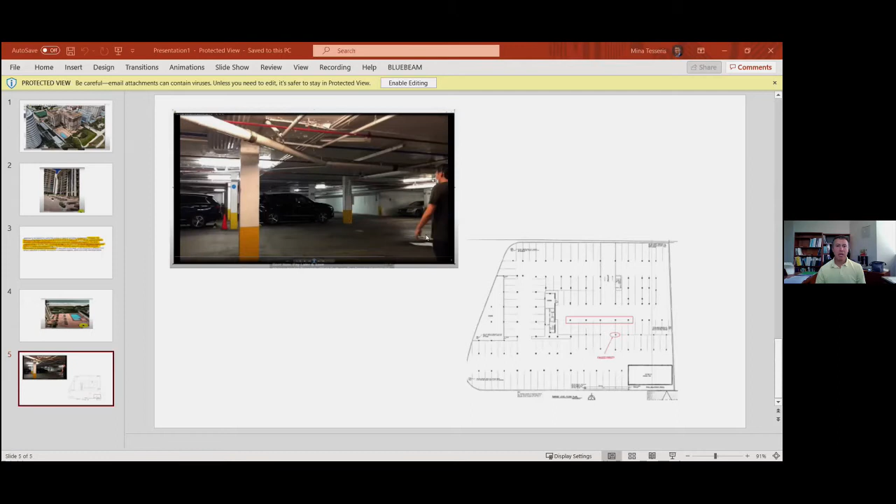So if we go back to the previous photos here, imagine this plaza deck disappearing, and that plaza deck is what's supporting the columns in this building. And when that plaza deck disappears, all of a sudden you have columns that are spanning from the second floor down to the basement with no lateral support from this parking garage slab.

And when that happens, what that does is it weakens the slab, and that is what initiated the collapse for the building. If you look at the video of the collapse, which is available all over the internet, you'll see that this is the area that collapsed first, and then everything else followed. So the lessons learned from this, what can we learn from the collapse?

Mina, can I just stop you for one sec? Can you just maybe give us the top lesson that we learned, and we can maybe come back to some of them at the end? Okay, sure. I'm going to give you two. Okay, two's good.

When you're making changes, always get a permit for the work that is being done, of course. And finally, as-built plans and design plans. This is important. I've harped on this for many years, but have your design plans available and your as-built plans available, because if the engineer that inspected this building didn't have access to the drawings, the engineer would never have known that those drop panels should have been there.

Thanks, Mina. So, it's a great summary of what happened in Florida. And even just you taking us through it, we can see visually there were some signs there which may not have been paid any attention to, but adding those things all up can end up in such a catastrophe.

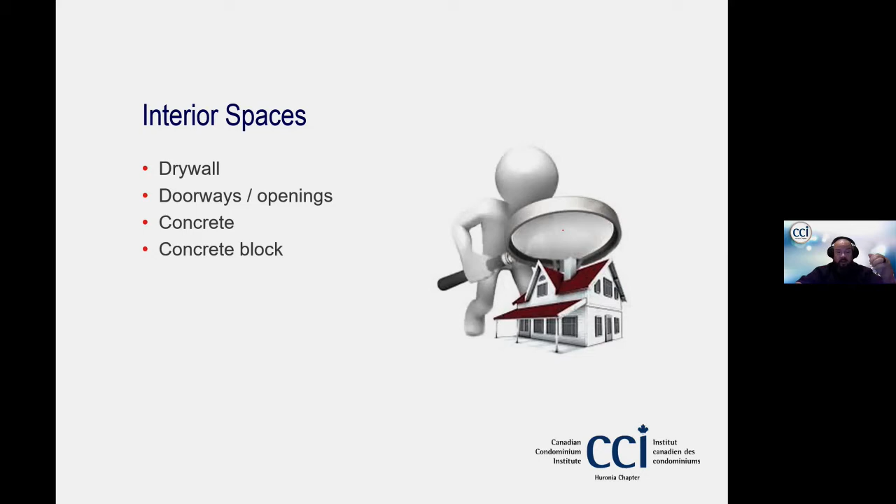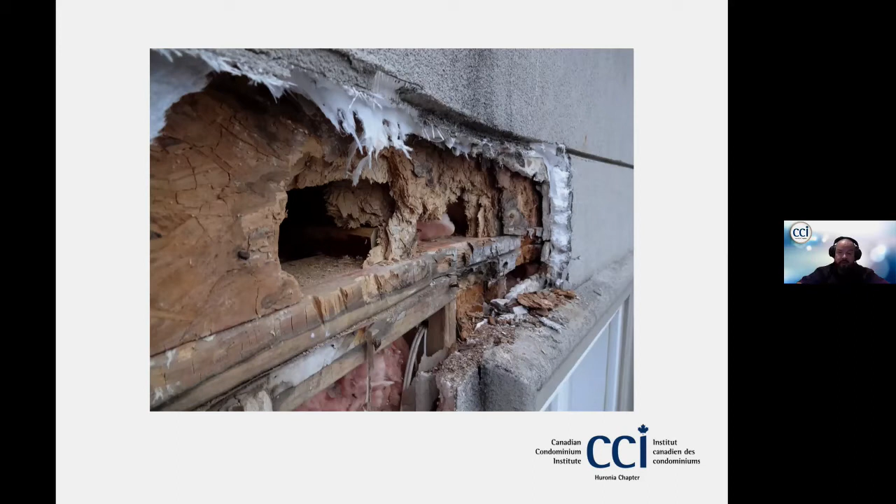And indeed, in this case, found out as soon as we opened up and removed that stucco, that the structure behind it, which was an all wood one, was being slowly eaten away by that moisture that was getting in. So despite the fact that it didn't start as a structural issue, it was becoming one because of water penetration. And so again, something you want to keep an eye on and jump on sooner rather than later.

Now, when this was investigated, it turns out that this moisture had gotten inside the assembly, and there were further wood components and steel components in behind that were getting quite severely damaged. So again, watch for these kind of things and jump on them sooner rather than later and have them looked at before they can have the potential to become an issue.

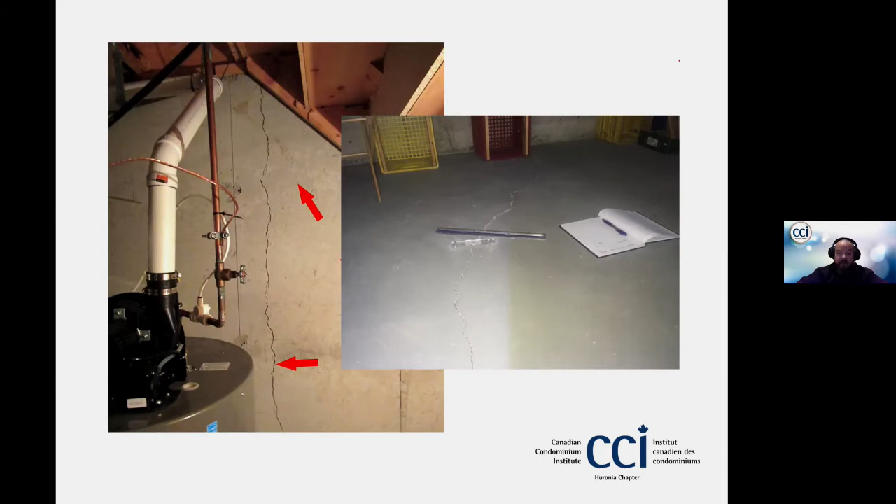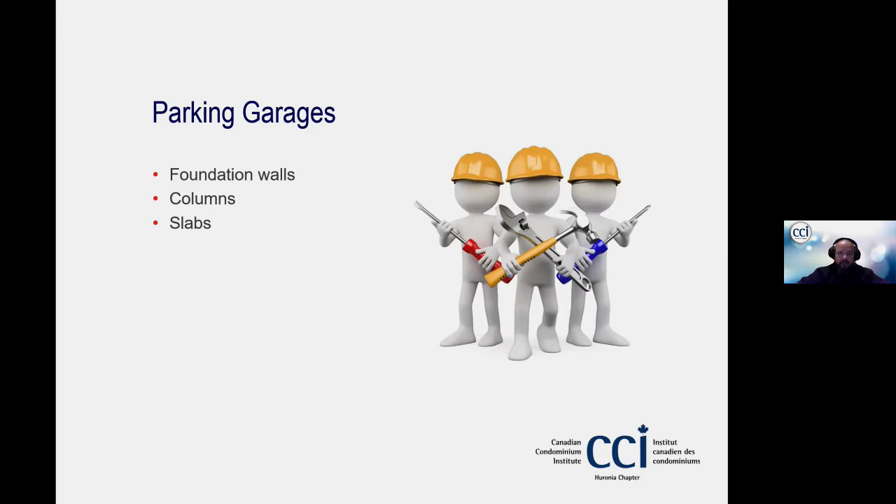Not a bad choice. Parking garage is an important one. And as you saw with the images from Florida, again, this is an important part of your foundations and is subject to quite harsh environmental conditions, including all that water and salt and everything else that could go in there. So when it comes to those, again, something to keep an eye on, something we see regularly.

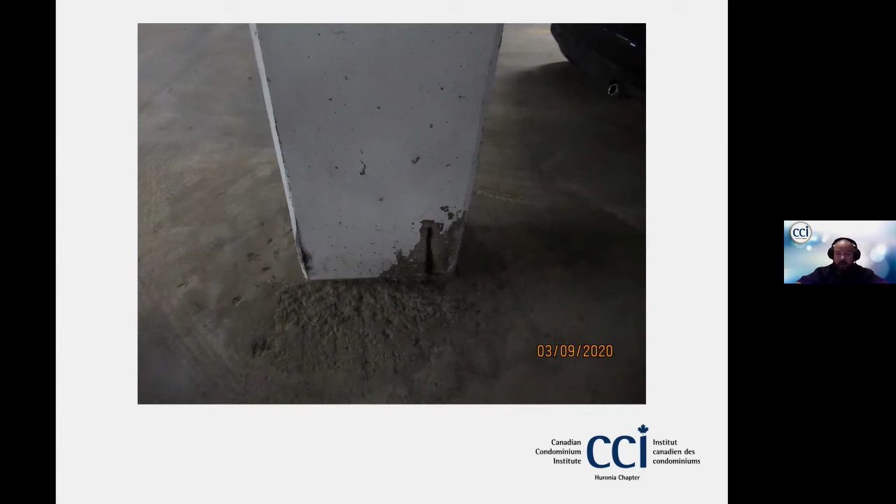Columns within your garage, also important. We see this on a regular basis, bases of columns where lots of water is splashing on here and potentially some salts, etc. And it starts to damage and deteriorate the concrete at the base of these. And right at the base of this column, you'll see that the section of concrete is broken off or delaminated, and you'll see the rusting reinforcing there. Again, something that shouldn't be ignored, something that should be kept closely monitored and repaired.

Basement floor slabs, again, in a garage situation, we get calls all the time where there's cracking in the floor slabs within the garage. Much of this can turn out to be just shrinkage cracking, which is very regular and typical when you're pouring large areas of concrete. But in some cases they have turned out to be the initial signs of movement, which in the case of one we had seen, the cracking ends up becoming circular in nature and is circling around locations like columns, etc., which can indicate the punching kind of issue that Mina was describing.

Balcony is another great one. Again, it's something that everybody has access to and you can keep an eye on a regular basis. And for most of the structures these days, we're seeing them either built out of concrete or built out of wood. When it comes to your concrete ones, similar to garages, you want to keep an eye on these areas. Again, they're fully exposed to the environment and subject to lots of moisture and freeze-thaw cycling. And often it just starts fairly simply.

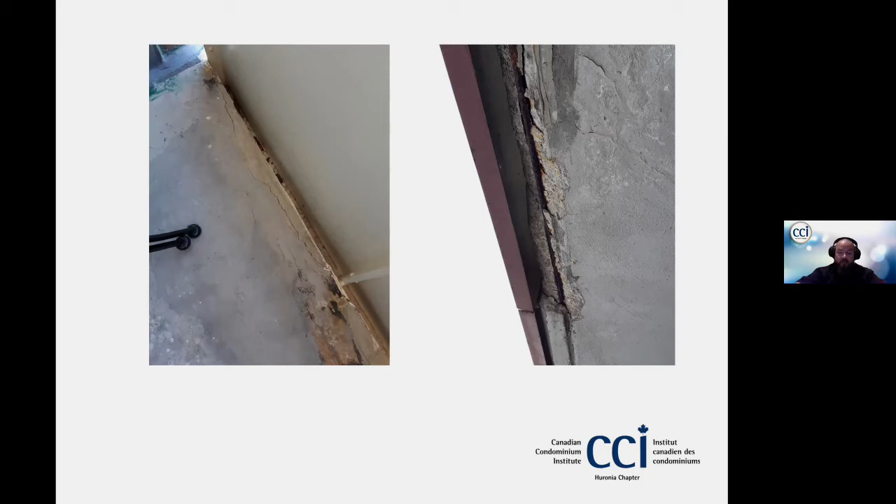Again, something that shouldn't be ignored, both from a safety standpoint, since in this case that concrete fell off the building and down to the ground, and in the second case, these are the early signs of deterioration. And as we're discussing, maintaining your diligence when you're inspecting and keeping an eye on it, from a reserve fund standpoint, that can be done. But from a standpoint of making sure your unit owners are being informed, and maybe as part of your spring walkarounds, the board can also be keeping an eye on these things as well.

Thanks, Kevin, I'm just going to cut you off there because we're running out of time. Okay. But this is my last one. Last picture? It is. Okay, go ahead. This one's super interesting. I just want to throw this in at the end. On this one, I'll give you a pass.

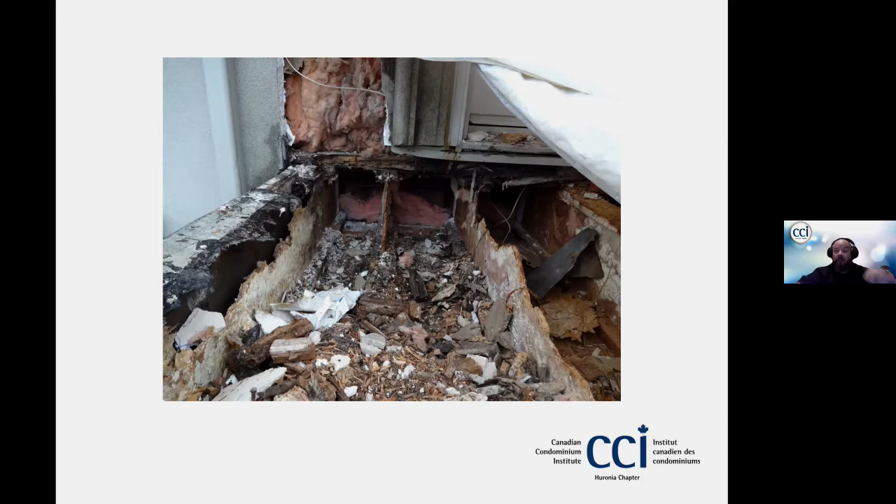This one's a wood structure building. I just wanted to show this balcony. It looks very good, but we got a call from a unit owner saying, "The floor of my balcony feels somewhat spongy when I stand on it," and otherwise it looked normal. But when we removed the membrane from the balcony, this is what was underneath. This was the remains of the structure of that balcony, based on the amount of water leakage that was happening. So a report of a spongy floor on a balcony turns out to be as bad as that on those occasions.

So further to what John was saying in terms of seeing symptoms, don't ignore them, definitely move on them. It doesn't mean you're looking at something as tragic as what happened in Miami, but these are the kind of symptoms you're watching for and should stay on top of. Thanks, Kevin. I think everybody's going to be doing some walkarounds this weekend or in the upcoming weeks, and it's a good lesson. Those pictures are great because they seem like just aesthetic issues, but there's actually something deeper underneath them, and they should be investigated so that you catch them early. Right. So thanks for that, Kevin.

All right. So moving from our engineering perspective of what happened in Florida and what we can do in our own condos, we're now going to move to the emergency preparedness side of our webinar. We're very fortunate to have Dave Tiller and Chris Pearman with us today. Dave, you're going to start us off on the fire safety planning side of things, and then Chris is going to take over and talk more about emergency planning. I think this is going to be a really good discussion about what we can do as condo owners, directors, residents, property managers to help ourselves, but also help the first responders who may be coming to our condo, hopefully not, but if they do, to make their job a little bit easier. So Dave, you want to start us off?

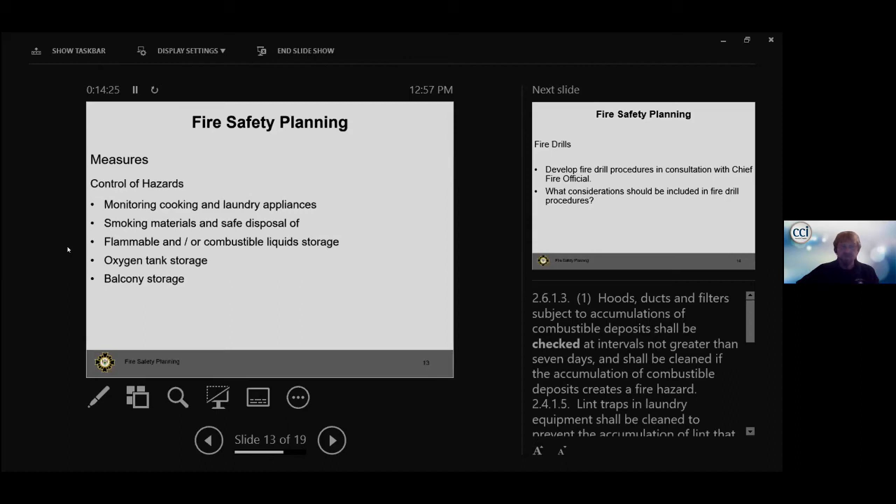Monitoring cooking, safe disposal of smoking materials, flammable combustible liquids. Do you have any? There's a certain amount of product that you're allowed to store in a single family dwelling unit. You're not allowed to store any flammable or combustible liquids on your balconies. What are you allowed to have on your balconies? Chris will show you some of the after effects of large storage on balconies. Oxygen tank storage, very important. The fire code does regulate oxygen tank storage, and it does apply to single family dwelling units. So reach out to your fire department, reach out to your property manager, or who's in charge of the fire safety plan, and ask those questions.

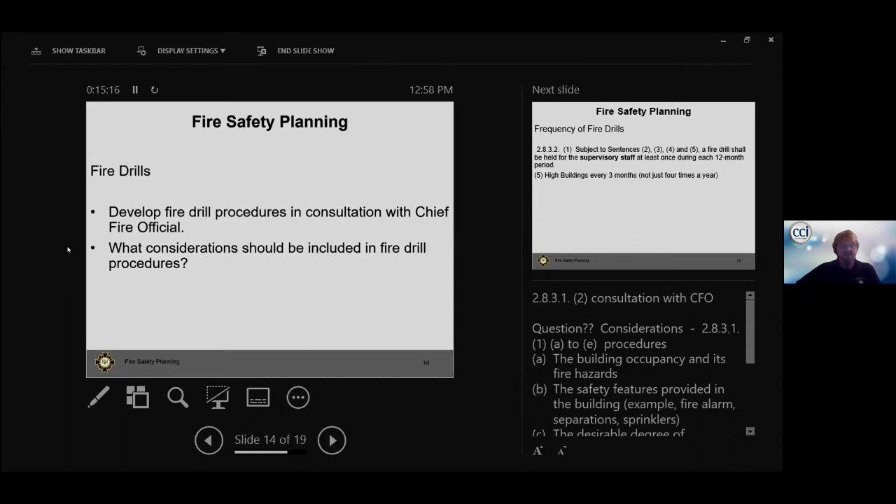Some of the things that are required in fire safety planning are fire drills. The type of building and the size of building will determine the number of fire drills that are required. What considerations should be included in a fire drill? Here, we need to think about who wants to be involved. Do the residents want to be involved? Are there people that require special assistance? What type of building is it? How big is it? Are there stairwells? Are there elevators? What type of fire alarm system is it? There's a number of things that have to be considered before we can develop fire drill procedures.

Now, the thing with that is frequency of fire drills, and I just kept with the type of occupancies that we're dealing with today. The supervisory staff is required to participate in a fire drill once each 12-month period. In a high building, typically over 6 stories, it's every 3 months. Bigger building, more people, more safety precautions. That's usually how it works. So who has to participate in fire drills?

It's the supervisory staff. Nowhere does it say that the residents have to participate in fire drills, though we strongly recommend it, but it's not a regulation. I have been involved with some condominium buildings, and they had fire wardens for each of the floors, but that's internal. And your fire safety plan would address that.

There were fire wardens for each floor, and somebody on that floor, when the fire alarm activated or during a fire drill procedure, went and knocked on the other doors to ensure that people are there, they can hear the bell or the horn, whatever it was, and to make sure they're okay and if they needed any assistance. Each building is unique. Not many people want to be involved with that. But then when you go to some buildings, a lot of people want to be involved with it. Again, the fire safety plan is unique to each and every building.

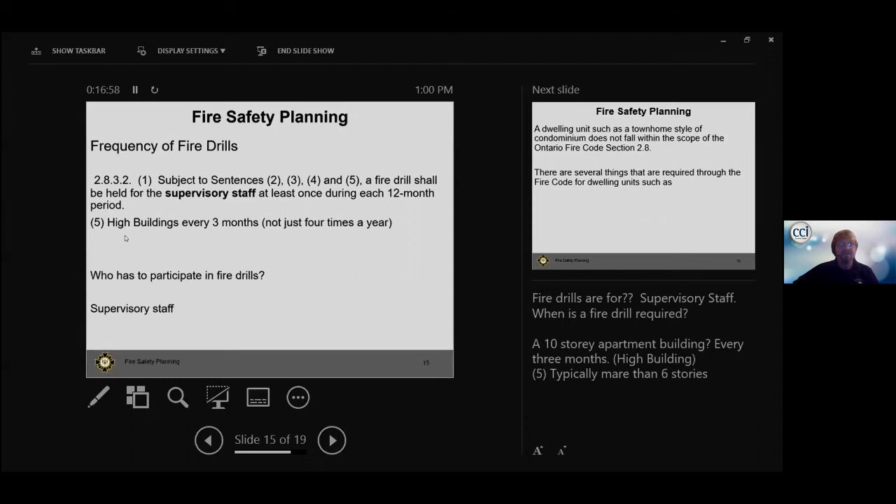Okay, so now a single dwelling unit such as a townhome style of condominium doesn't fall within the scope of section 2.8, which is fire safety planning. There are other things that apply to single family dwelling units, and the ones I'm going to talk about are smoke alarms and carbon monoxide alarms. Very, very important. The building code requires smoke alarms to be installed. The fire code also requires smoke alarms to be installed. And in some cases, you may require carbon monoxide alarms.

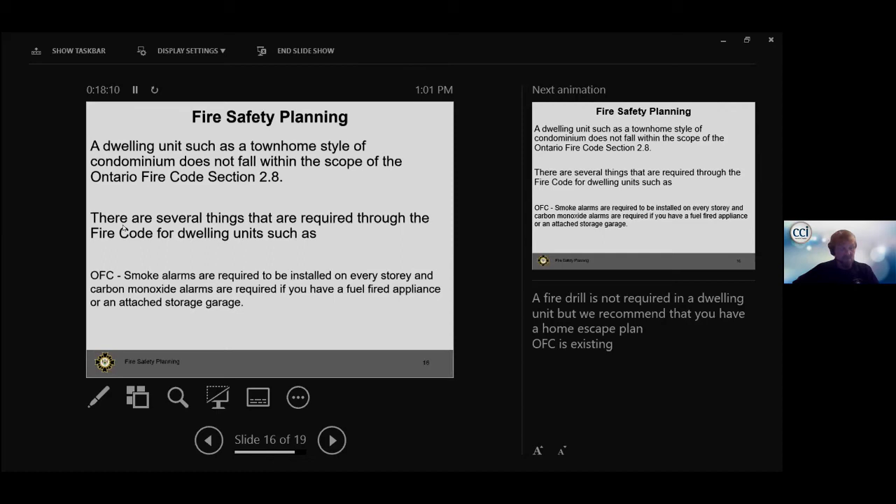In a single family dwelling unit, your townhome style, usually you'll have a carbon monoxide alarm because you're going to have a fuel-fired appliance, whether it's an oil furnace, a gas dryer, so on and so forth. In a condominium itself, like one single unit inside of a building, if you don't have fuel-fired appliances, you don't require a carbon monoxide alarm. That's mainly for the townhome style. If you have a fuel-fired appliance or an attached storage garage, carbon monoxide.

Also, if you've been constructed after a certain time within the Ontario Building Code, then your dwelling unit is going to have not only smoke alarms, but there's going to be strobe lights attached to those smoke alarms, and they're all going to be interconnected. And if you do have a fuel-fired appliance or an attached garage, you're going to have carbon monoxide alarms installed before you move in. So now, who's responsible to maintain the smoke and carbon monoxide alarms?

And you can put it in chat if you want. One of the first slides I showed, who's responsible for the fire code? The owner is responsible. So inside of your dwelling unit, you are responsible to maintain your smoke alarms and your carbon monoxide alarms. How do you do that? Test them monthly. You may need to vacuum them from time to time. And then at certain times of the year, you want to change your batteries.

So here are a number of links. I went into our website, the Office of the Fire Marshal and Emergency Management website, and there are a number of links regarding smoke alarms, carbon monoxide alarms, and home escape plans, which is very important for your single family dwelling unit. In a large building, we have fire safety plans. In a single family dwelling unit, you make your own home escape plan. And the links that are provided at the end of the PowerPoint, you can click on them and that'll take you right to the Office of the Fire Marshal's website. And that's about it.

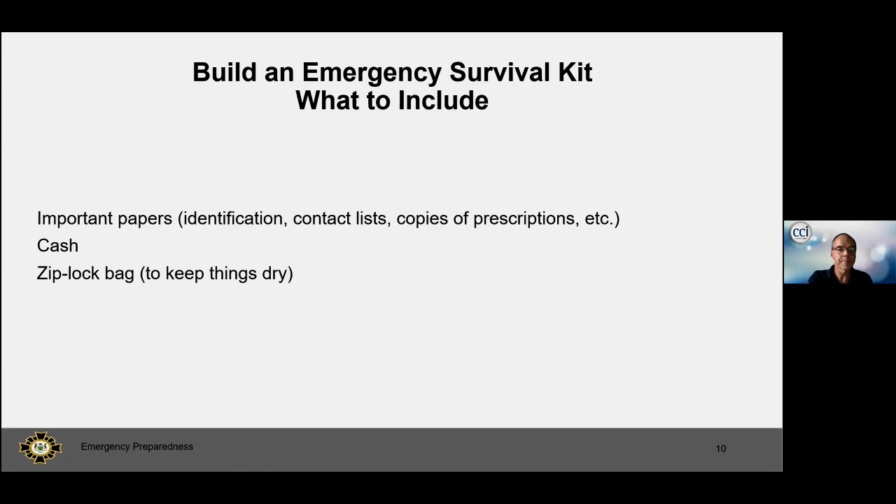Ziploc bags, garbage bags, special considerations. And hopefully nobody's ever going to have to experience this or go through this. Have you got small kids, diapers, formula, anything related to them? Prescription medications, medical supplies and equipment, again, oxygen bottles, walkers, wheelchairs, electric wheelchairs, anything like that. Need to take that into consideration.

Pet food and supplies, so litter box, litter for your cat, and probably one of the things that you need to take into consideration if you're going to have to evacuate is whether all this stuff is going to fit in your car.

Any other specific items to your family needs? Again, your survival kit's going to be unique to your family, and specific to your family needs. I think of stuff like traveling with little kids. They're going to be bored. They're going to need to be entertained. So you're going to bring a game for them, a deck of cards maybe. Do they have a special teddy bear, a special blanket that they're going to want to take with them? Any other special, specific medical needs that will require consideration.

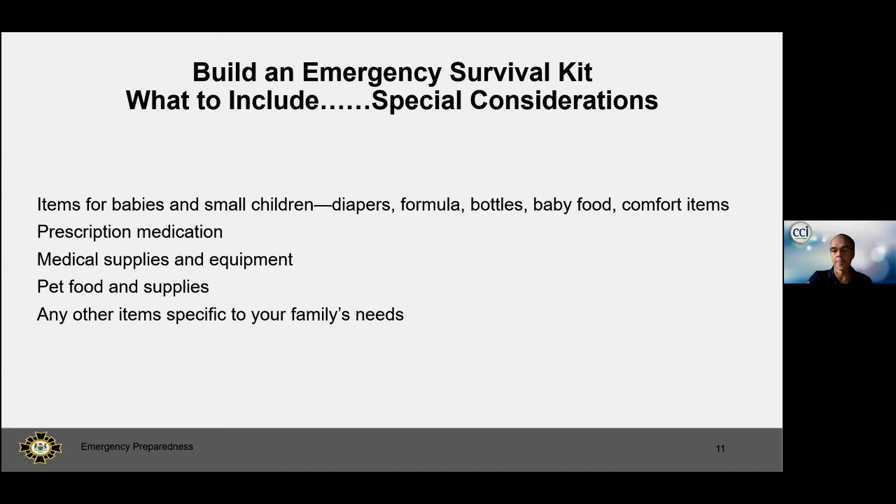Once you get your kit together, put it in a closet where everybody knows where it is. Review it from time to time. This is a biggie. You don't want a kit that's 60 or 70 pounds that you're going to have to drag out. In the middle of an emergency, you're already under a lot of stress. Make it easy to carry. Make sure your cell phone and mobile device is always charged up, similar to keeping your gas tank on your car full.

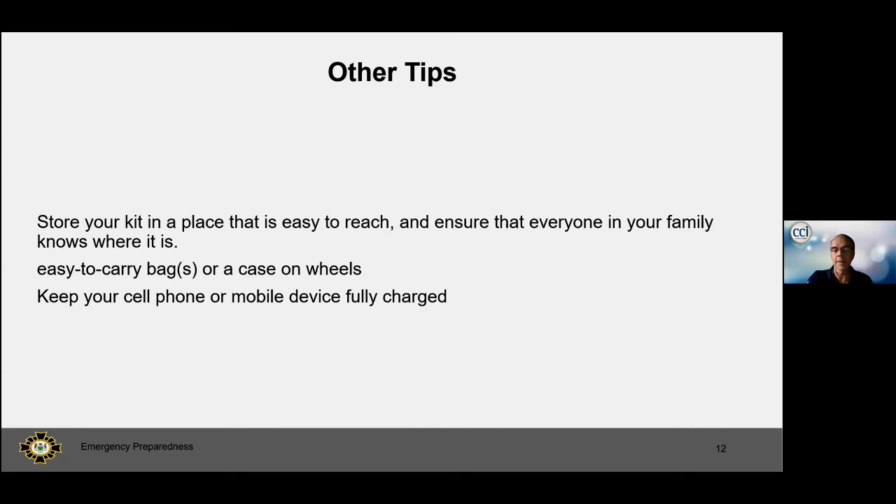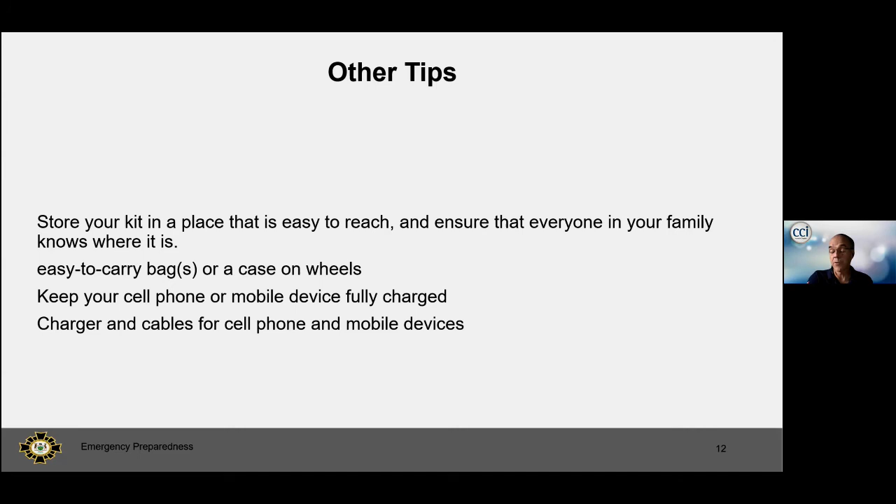Charger and cables for your cell phone. That's going to be probably your main point of communication with your family down the road. For the foreseeable future, you're going to need to be able to charge it. So be informed. Ontario has a very good warning system, an alert messaging system that comes out to your cell phones. And I've included this in here, and it's in the link where you can actually go to the various service providers and you can check to see if your cell phone is capable of receiving these alerts. Social media is going to be a very good source of your information.

Do not use the elevator. As Dave indicated, the triggering of the fire alarm can cause the elevators to be recalled to the ground floor. You could be wasting valuable time going to your elevator, pushing the button, and nothing is going to happen. Head for the exit. Do not re-enter the building until instructed to do so.